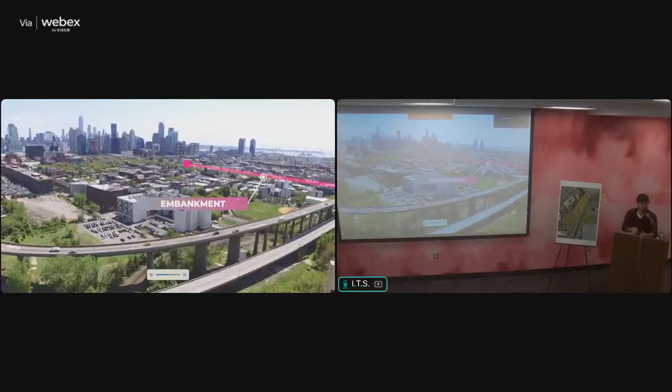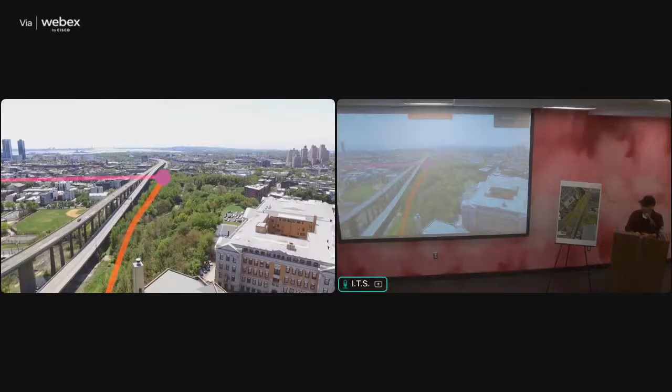And now the long-term plan, as I touched on earlier, is to have connectivity between basically the waterfront on the Hudson, extending all the way back over the 6th Street embankment, through the Bergen Arches. And many of you have read about where we're going with OSI with regards to acquiring a bike path that will connect Jersey City ultimately to Montclair, so Hudson County through Essex County.

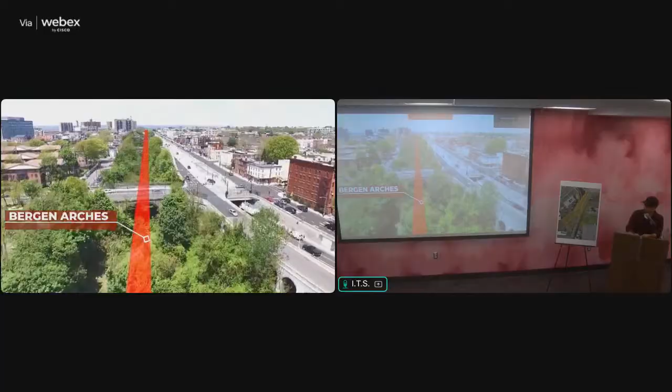So the big picture here is really a once-in-a-lifetime opportunity for any city. You don't see chances like this surface, and that's why we're really mindful of putting all these pieces together, because they happen to be aligned in this particular moment.

Okay, so that was from 2020, and I don't know if you guys can guess who that was speaking, but that was Steven Fulop. And that just kind of shows you how long this has been discussed.

And obviously we've come a long way since that time, and many things have happened and developed with the embankment and the arches. But now we've come to a moment where we've had the city conduct a feasibility study that talks about this idea and challenge of putting both transit and a greenway for pedestrians and bike and walk, for people to just access and enjoy nature next to each other.

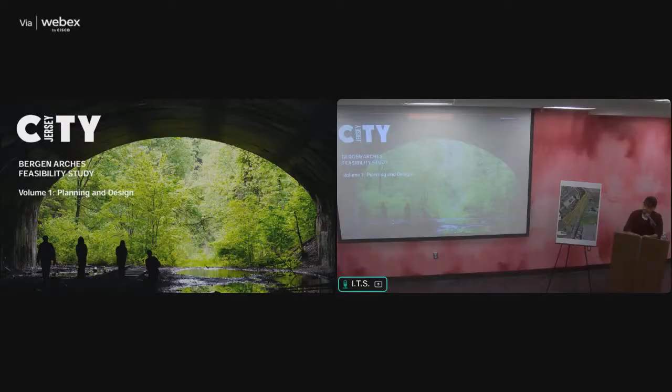So this is just a quick image here of the city's cover for the feasibility study. It's available online. We're going to be putting it on our website, and we'll be printing it out as well to showcase at our office space at 2815 Kennedy.

But now, kind of just talking in terms of context, I still know there's a lot of people that don't know where the arches is, and hopefully that drone video kind of puts it in context a little bit. But just if you didn't know where you were in that moment, Route 139 is to your right, and I have Dickinson High School to the left. And you could see why it's easy to sort of pass by this space and just kind of miss it, because it's right under you, and you probably walk by it many times and just haven't noticed that it's there.

So really, that's why we got started with the Bergen Arches Preservation Coalition, is to try to create this awareness that this space exists, because once people find out about it, they see a lot of different opportunities to do a lot with this space.

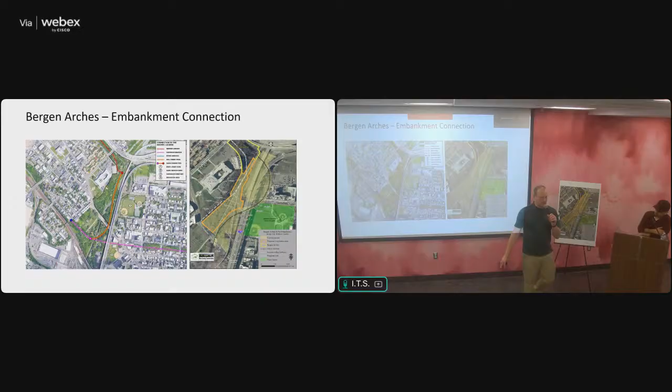Basically, imagine this line here. We could go on one side through the school property. If that, for whatever reason, wasn't available, we could go on the other side through the rail property, both connecting to Newkirk Avenue, then to the existing Jersey City bike lanes, right to downtown Jersey City.

Correct, neither of those crosses an active rail line. The active rail line is this black line here, and there's a bridge right here. So we would come out of the arches to Newkirk Avenue, onto the existing Jersey City bike lanes, and those go right under this bridge.

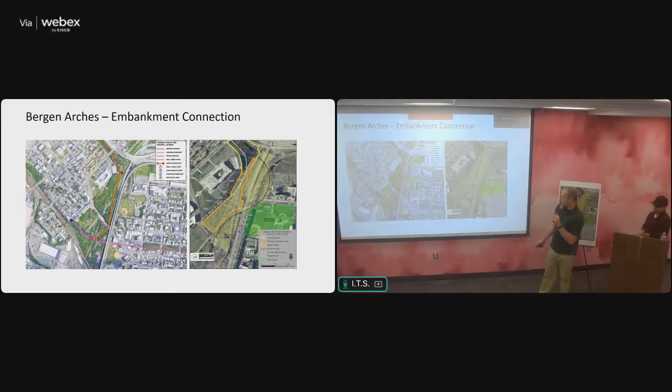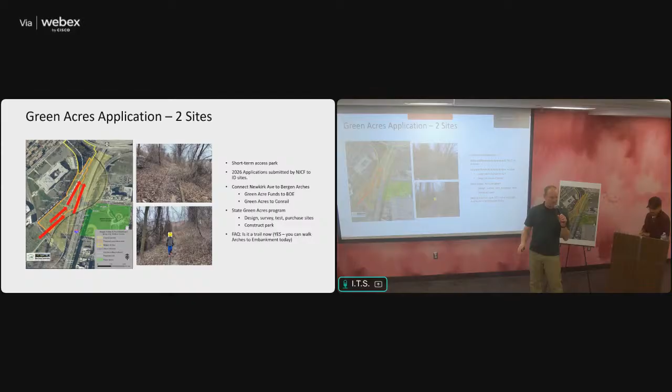Reed, you want to tell us about this incredible slide? That area Chris was just speaking about—this is taken within that area. You can see between the highway and the high school how much green space already exists there. One thing we like saying is there is a lot of green space in Jersey City, it's just not accessible for people. But if you were to map out everything that exists right now in terms of green space around the city, you'd see there is a lot of space we could potentially reactivate and allow people to access.

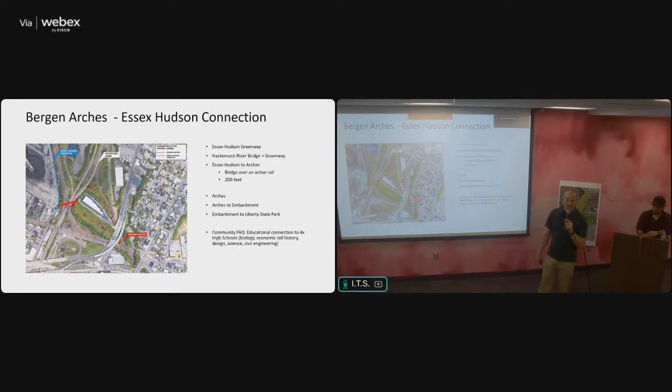There are areas that are reserved for transit - not imminent, definitely not for FIFA. It's very similar, same deal as the embankment. There's a little sliver, but will there ever be transit on there? It's hard to see it making sense, and it's hard to see, especially once people experience what it is and see where transit dollars could be better spent. It's hard to see there being significant transit quickly.

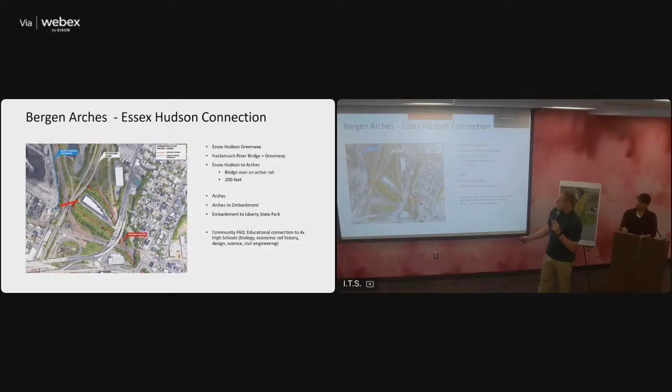I agree with you. Mm-hmm.

Good question. The state's allocated $20 million to figure that out. A lot of folks have been like, wait a minute, $20 million, that's actually a real amount of money.

There is a street right above it. A lot of folks in the Heights have shared that they feel like they have a hard time getting the transit that they feel they need. People have shared that the PATH train is very busy. Y'all know the challenges.

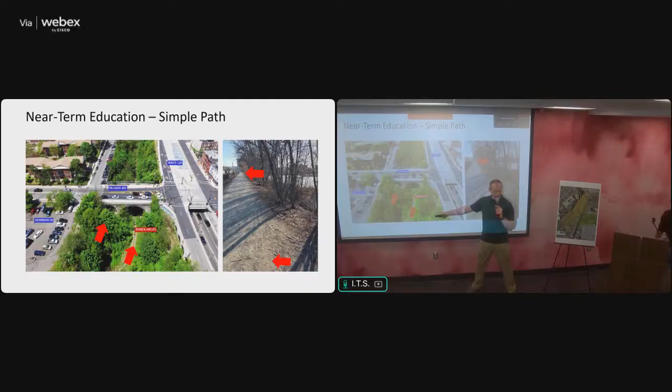This happens to connect to the Holland Tunnel right into New York now. There's already access. You could imagine, at significant cost, coming out of the arches and building a huge ramp that connects into the Holland Tunnel connection area or to Jersey City streets. But you can imagine the cost of that and the time, and the pollution, the challenges - they don't right now.

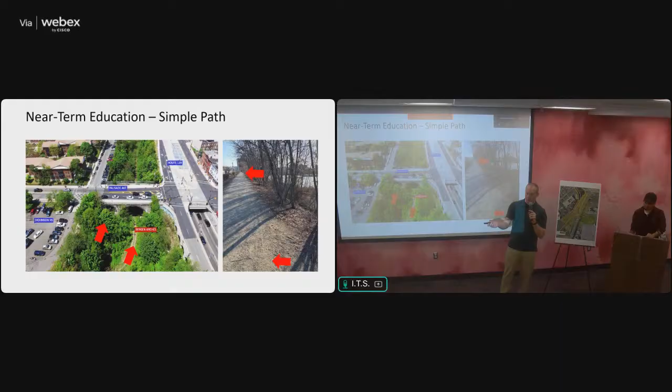I think this is a to-be-figured-out question, but the things we've heard is there's no buses in the Holland Tunnel now. There could be. It could go to one of the PATH stations downtown and have a drop off, then loop around and go back up to Secaucus.

We can look at a few more slides, or we can talk more about bus access. We can do either one.

Good question. I know it goes to the Tropicana plant. I know it goes to an active port. I feel like this is a chance for audience involvement, if anyone wants to - yeah, there's definitely, you see the Tropicana, like Tropicana, and you see Amazon. But that's a good question, if anyone wants to look it up and see what actually is on all of these.

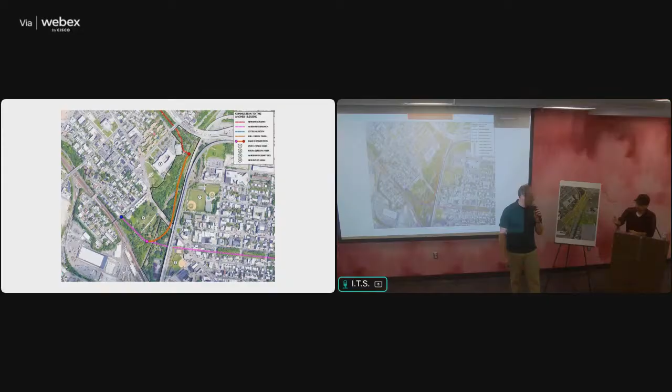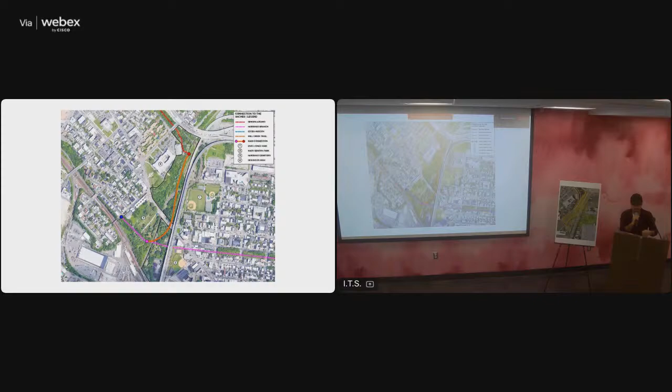So yeah, the whole transit discussion has been kind of a thing that has been ongoing since the news dropped. We've been collecting community input. I have a QR code here somewhere. I don't know if you guys know how to use that, but this will take you to bergenarches.com/comment page. There you can read about NJ Transit's press release, because that's really all the information we have right now as to what they're planning on doing in the Bergen Arches with their Transitway project.

We've gotten a lot of feedback, and it's been very mixed, but I think a lot of it is pointing towards this idea that yes, Jersey City, there are people in Jersey City that want easier ways of commuting throughout the city and also to their jobs. And they feel like generally there needs to be more of a study done to implement bus lanes throughout Jersey City as to whether or not it is the best use for the arches.

I think that is still misunderstood because people haven't been able to access it. Once you get people close enough to the arches, and going through what Chris was talking about with the Green Acres applications and building the sort of pocket park behind Dickinson, bringing them as close as possible to that first arch and letting them see the project, will create this understanding that, or question, is bus lanes the best use of this property? And do we really want to remove all the trees? But the whole idea is to really get people in there. Without getting people in there, you can't really understand the scale of it, or see what makes it so special. And being there is way different than looking at it through an image.

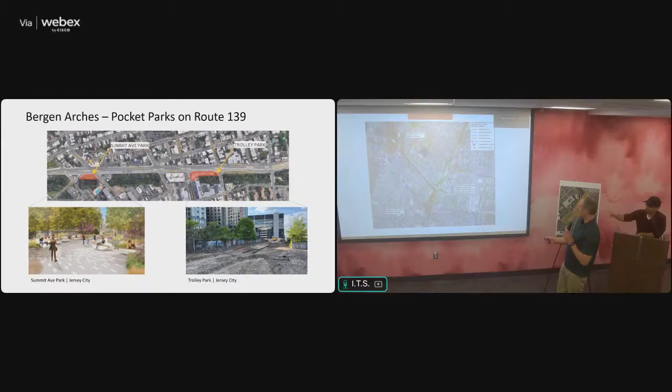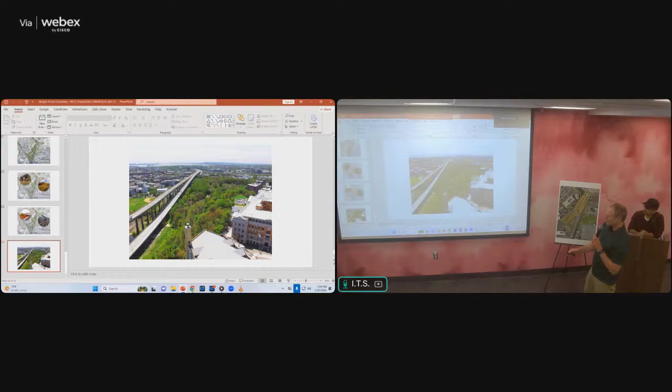Yeah, let's go. We can go back. Too far back. Tech support. Phone a friend.

Yeah, right here—so access via Dickinson High School. This loops down. You come in on the existing rail grade, and then a pocket park right there. And if anybody says yes to that, then my next request is, can I have another 200 feet of trail like we have at the reservoir, and another pocket park? If they say yes to that, what should we ask for? Another 200 feet. Yeah.

Question is about safety perspective. New Jersey Transit is, I think rightly, very focused on safety. They have a lot of rail yards and a lot of area in New Jersey where high-speed trains abut against many uses, so they're very focused on safety.

There's trip hazards - well, that's what I meant for the pocket park idea. If you're just curving in, where's the danger? I guess I don't see it because I just see trees. Oh, but you're out here, not even entering it at that point.

If that's the point, that's it. They ask very good questions like, how would you keep people from falling? What type of insurance coverage do you need? How would you manage access? What if people don't want to leave or start going in on their own, causing trouble? Those are all very realistic questions that have very clear answers.

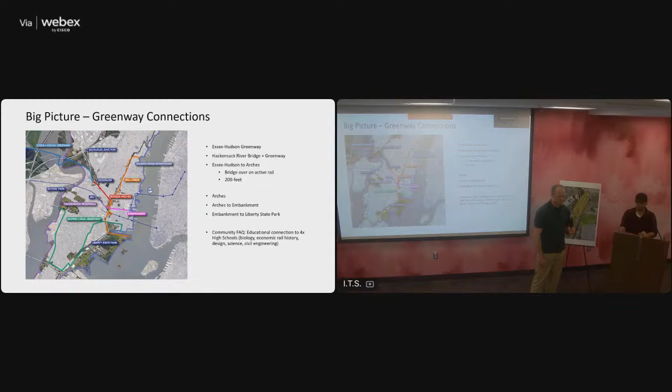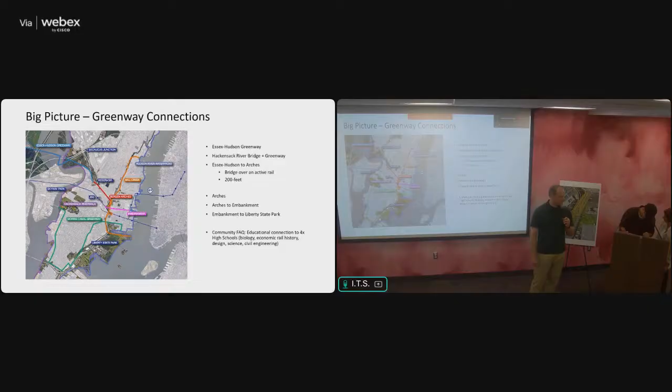We've borrowed a printer, but we have just the QR code we can put up. Reed, we should make a flyer, I think, is the takeaway. Yeah, the QR code will take you to it. We have a website at bergenarches.com/comment. We can put it on a flyer, I think it's in our office. I'm looking for something I can send around to get other people involved. Oh yeah, we'll create a flyer, send it to you. And we've been sending it on our newsletter, we printed it out as well, and we've been handing it out to people. But yeah, if you have ideas, send them our way.

I will say we did submit a letter to NJ Transit at their last board meeting, and Jersey Digs also submitted questions to NJ Transit when we were doing our interview. Right now it's really just been questions - why wasn't the Greenway mentioned, are you planning roadways through the arches? We always thought it would be light rail, something lighter than a roadway. We haven't gotten direct responses. The closest we got was during a News 12 New Jersey piece, where they mentioned putting greenways next to transit, which is all they will say. It goes to the point you were asking - will they ever allow us to build a greenway before transit? They want to see a greenway next to transit, that's their message right now. But it would help if we connect with other groups, like Bike JC or the Embankment, to share that letter we sent them, so we can get more people sending letters too. At some point we'll keep hosting these community meetings to raise awareness, and then we could do what someone suggested - a showing at their next board meeting. I would totally be for that.

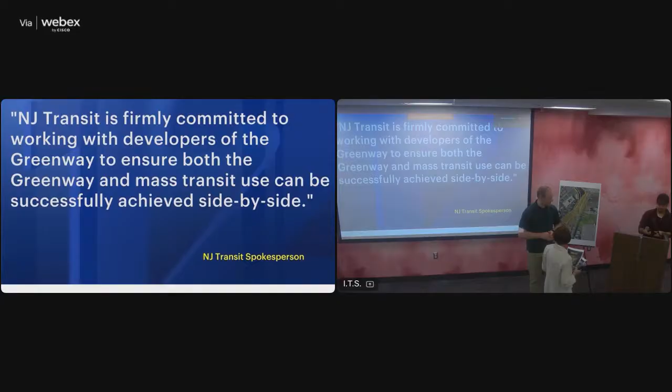Information - oh, I did, yeah. Thank you.